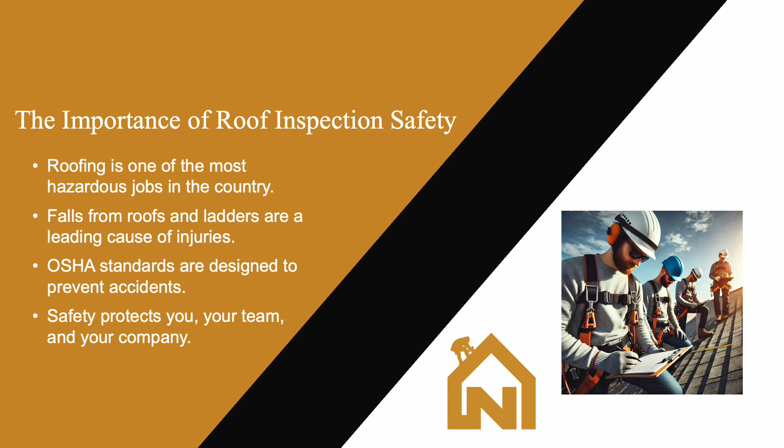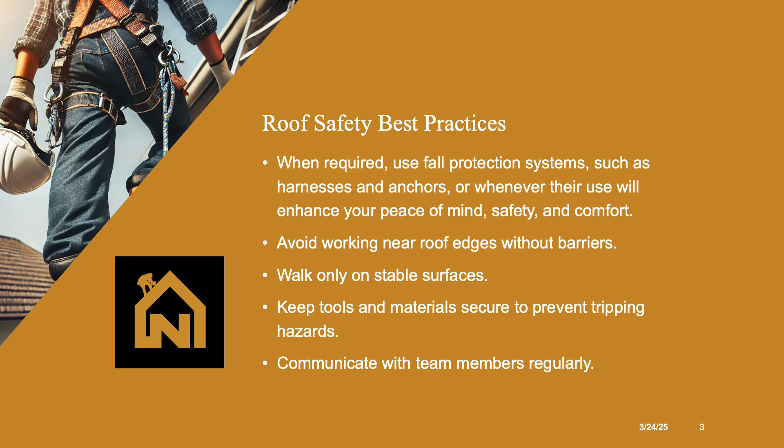Preparation is key before accessing a roof. Start with the inspection of your ladder for any defects. Assess a roof's condition from the ground to identify potential hazards like weak spots or loose shingles. Always use appropriate personal protective equipment known as PPE, including a helmet and harness, and secure all your tools to prevent drops. Let's go over your pre-inspection safety checklist.

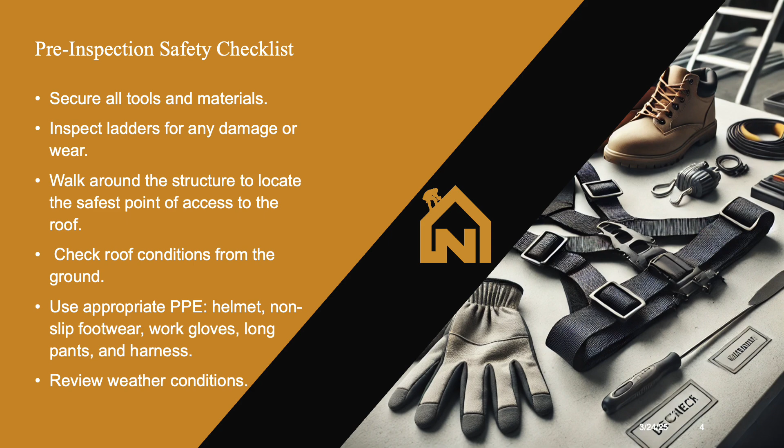Secure all tools and materials. Inspect ladders for any damage or wear. Walk around the structure to locate the safest point of access to the roof. Check roof conditions from the ground. Use appropriate PPE: helmet, non-slip footwear, long pants, and harness. And review weather conditions.

Using a ladder safely is essential for roof inspections. Always use a ladder designed for the height and weight requirements of the job. Maintain a proper angle by following the 4-to-1 rule and ensure the ladder extends at least 3 feet above the landing point. As you climb, keep 3 points of contact at all times.

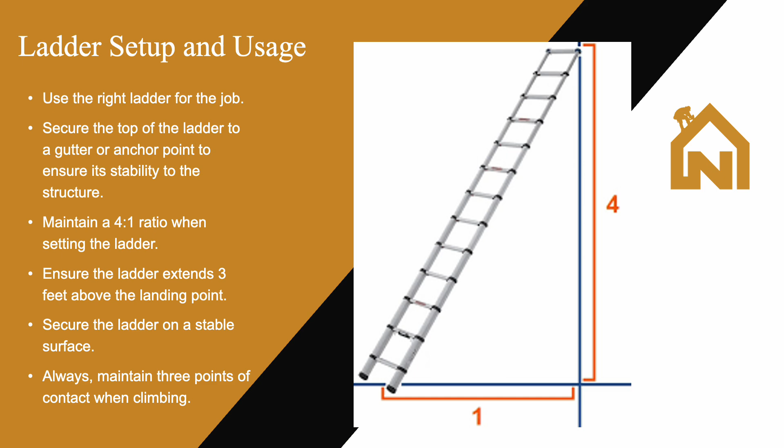Let's go over the points on this slide, which summarizes proper ladder placement. Use the right ladder for the job. Secure the top of the ladder to a gutter or anchor point to ensure its stability to the structure. Maintain a 4-to-1 ratio when setting the ladder. Ensure the ladder extends 3 feet above the landing point. Secure the ladder on a stable surface. Always maintain 3 points of contact when climbing.

Adherence to OSHA standards is critical for maintaining safety on the job. If your work involves activities beyond pre-construction inspections, post-construction inspections, routine maintenance checks, or storm damage assessments, fall protection systems must be used when working at heights exceeding 6 feet. Proper training and compliance are mandatory to minimize risks and ensure safety.

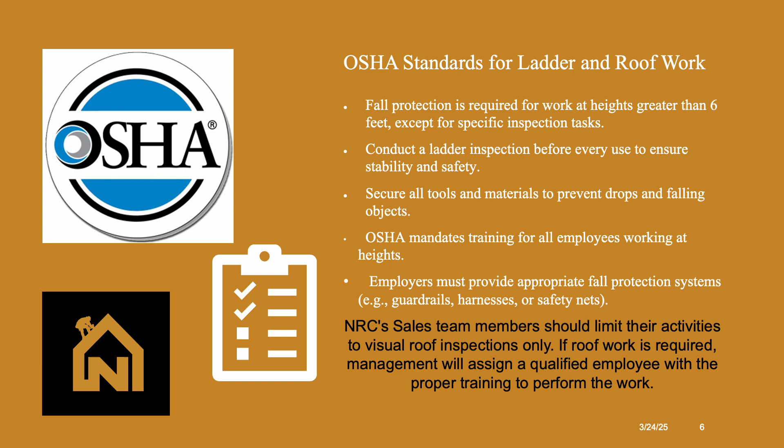OSHA does not require fall protection for the types of inspections our sales team conducts, which are pre-construction and post-construction inspections. These inspections are limited to visual inspections and do not involve physical tasks like repairs.

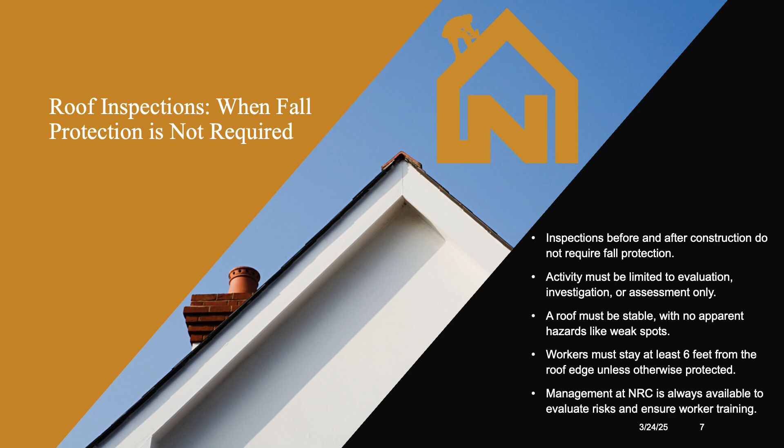Let's do a final review with examples of the types of inspections our sales team members perform for homeowners, where fall protection is not required. NRC's sales team inspections are visual evaluations while avoiding hazardous areas. Remember, staying alert and working within safe distances is key to maintaining safety without the use of harnesses or barriers.

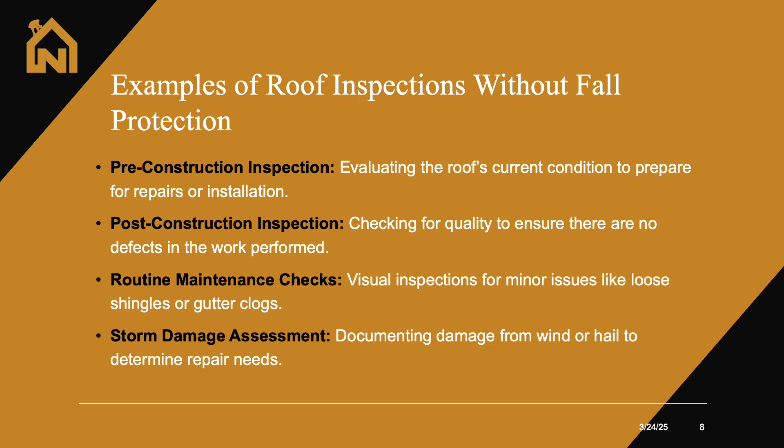Here are examples of roof inspections where fall protection is not required. Pre-construction inspections: evaluating the roof's current condition to prepare for repairs or installation. Post-construction inspections: checking for quality to ensure there are no defects in the work performed. Routine maintenance checks: visual inspections for minor issues like loose shingles or gutter clogs. And lastly, storm damage assessments: documenting damage from wind or hail to determine repair needs.

In some cases, such as pre-construction or post-construction inspections, OSHA allows for the use of controlled access zones instead of conventional fall protection. Please note that management at NRC must approve the use of a CAZ. During a CAZ, zones are marked areas at least 6 feet from the roof edge and restricted to trained personnel only. Employers must assess the risks and document the justification for not using traditional fall protection. While CAZs offer flexibility, safety remains the priority, with clear barriers and signage to alert everyone on site.

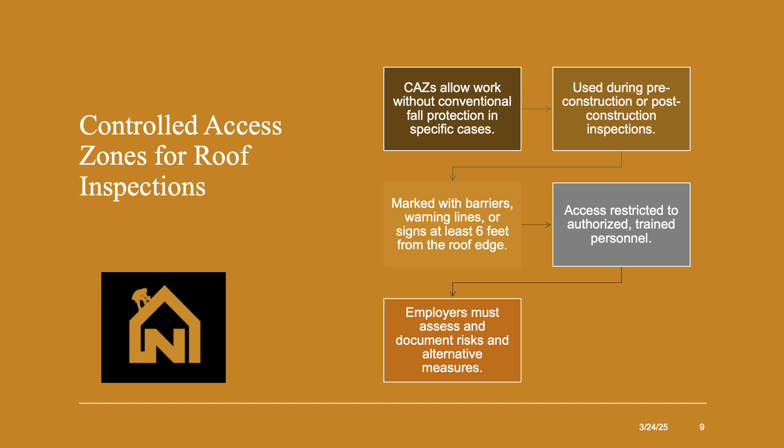Let's review controlled access zones for roof inspection requirements. CAZs allow work without conventional fall protection in specific cases. It is used during pre-construction or post-construction inspections, and it is marked with barriers, warning lines, or signs at least 6 feet from the roof edge.

NRC has designed its own roof inspection checklist. It was designed to ensure our roof inspectors get all the information they need to file a successful claim. Its use is mandatory for all roof inspections performed for NRC. The roof inspection checklist is available in AccuLinks for easy access. Paper copies are also available at our main office. If you prefer a printed copy, you can locate the checklist in the Checklists folder on Dropbox. Once printed, completed paper checklists can be photographed and uploaded directly into AccuLinks for record keeping.

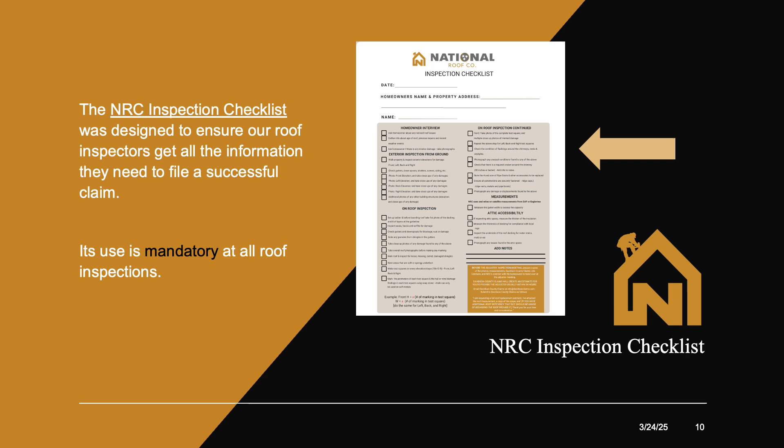Hazard identification is a critical skill during roof inspections. Always be on the lookout for weak or damaged areas, slippery surfaces, and overhead power lines. If weather conditions aren't ideal, such as during rain or high winds, always delay the inspection to ensure your safety.

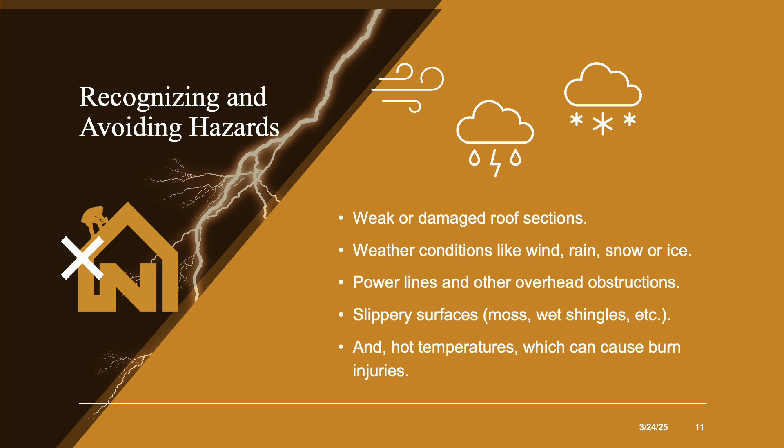Recognizing and avoiding hazards includes but is not limited to weak or damaged roof sections, weather conditions like wind, rain, snow, or ice, power lines and other overhead obstructions, slippery surfaces, moss, wet shingles, and during the summer and fall, hot temperatures can cause burn injuries.

Despite our best efforts, emergencies can happen. A clear communication plan can save valuable time if an incident occurs. Report all accidents to management immediately.

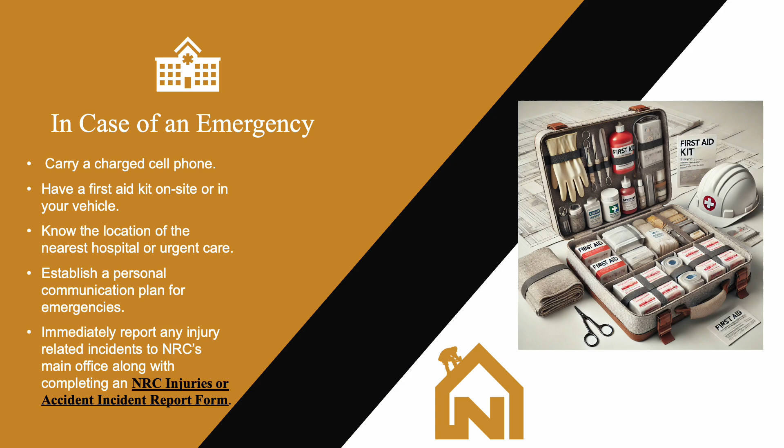Be prepared for an emergency by always carrying a charged cell phone, have a first aid kit on site or in your vehicle, and be familiar with its contents. Know the location of the nearest hospital or urgent care. Establish a personal communication plan for emergencies, and immediately report any injury-related incidents to NRC's main office, along with completing the NRC Injuries or Accident Incident Report form.

Safety is not just a policy, it's a mindset. By following the protocols we've discussed today and staying vigilant, we can protect ourselves, our coworkers, and our company. Thank you for your commitment to safety.

Safety is everyone's responsibility, therefore: follow safety protocols every time, stay aware of your surroundings, use proper equipment and tools, and communicate concerns or hazards immediately.